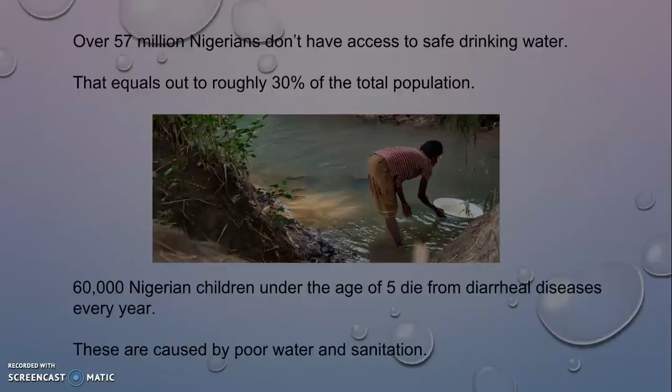Not only that, but 60,000 children in Nigeria under 5 years old die annually from diarrheal diseases caused by poor water and sanitation. Now, we weren't aware of some of these statistics until only recently, and here's how it began. We all went on a vacation to Nigeria. As we toured some of the known landmarks in Nigeria, we stumbled across a village. Nigeria had many more villages than cities, so it wasn't much of a surprise.

But when we examined the village a little closer, we saw that there were some hard-working Nigerian children walking back to their village with containers full of water on their heads. These poor souls were supplying water for the entire village to drink and survive. After seeing the children, we quickly became curious about where its water was actually coming from, so we walked in the direction of where the children came.

A kilometer or so later, we found it, the place where the water was coming from, and we were shocked. It was a filthy river with opaque brown water that could not be healthy for a human being under any circumstance. To make matters worse, we saw some of the children sipping up some of the grimy water from the river just because of how thirsty they were. We couldn't bear this sight, so we asked our tour guide why they were drinking this, and he simply replied that they had no other choice.

The Nigerian government could hardly give a damn because they were blowing money on road infrastructure. We became furious, and we decided there had to be a change. The villages in Nigeria couldn't go on like this. So after weeks of research and theory crafting, we came up with a solution. Our solution to the lack of potable water in Nigeria is broken into 2 parts. The first part revolves around acquiring the water. We propose that water wells should be drilled in villages of Nigeria.

These water wells can help to acquire water that is of far better quality than the water that lies in the polluted rivers. Groundwater is free of disease-causing organisms and virus-inducing bacteria, as well as many other contaminants that would be found in water exposed to open nature. Not only that, but water wells are relatively cheap and efficient as well. Just one water well can support an entire village of over 2,000 inhabitants and costs about $8,000 on average. The cost can vary, however, between $500 and $50,000, depending on depth to the water, soil toughness, etc.

The best method of creating water wells is mechanical borehole drilling, which involves using a large drill to create a hole into the ground, usually around 30 feet deep. The wells are then reinforced with concrete to wall off the dirt, and a metal seal plate is placed on top of the well to prevent the groundwater from being contaminated. The wells also have a mechanical water pump built in, so that the water can be safely acquired without much physical effort. Now, even though groundwater is relatively clean, it still requires some filtering as it is not 100% drinkable.

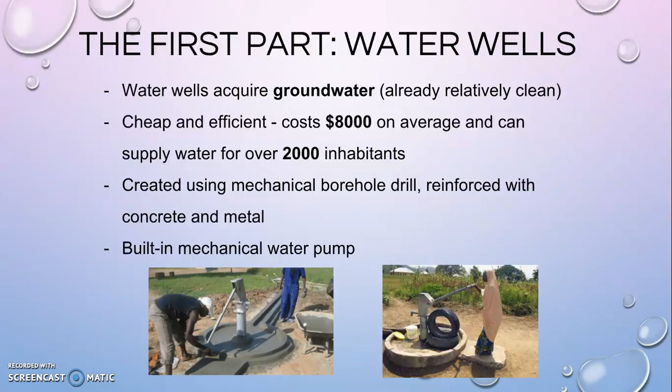This leads us to the second part of our plan, which is cleaning the water itself. On the pump of the water wells, slow sand filters will be attached to filter the water as it is acquired. These filters keep out many contaminants such as sediment and elements like arsenic and iron. They also significantly reduce any odors in the water and improve its overall taste. Slow sand filters are made with layers of sand and gravel. On the top layer of the sand, a biological layer made up of microbial bacteria is grown, called schmutzdecke, where particles of foreign matter and biological matter are absorbed from the water.

One of the best things about these filters is that they are quite cheap, as the materials can be found very easily and constructing one isn't too difficult either. To create an automated filter, it costs around $600. The only downside of a slow sand filter is that, like its name suggests, the rate at which it filters water is kind of slow. It filters approximately 250 liters of water per hour per meter squared of sand. This shouldn't pose much of a problem, as it is more than fast enough to get water for everyone in the village throughout the day.

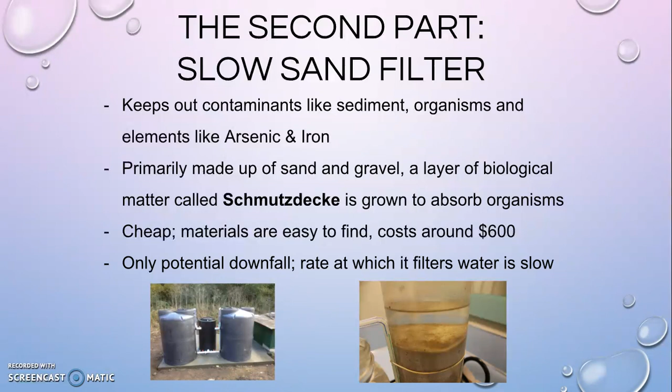Here's a quick rundown on how the filter actually works. The contaminated water comes in through the opening valve, where it then passes through the schmutzdecke, removing all of the biological matter from the water. It then goes through the sand and gravel, where sediment and metals are cleared, and it finally goes into the underdrains, where it flows to a tank of water from which it can be obtained.

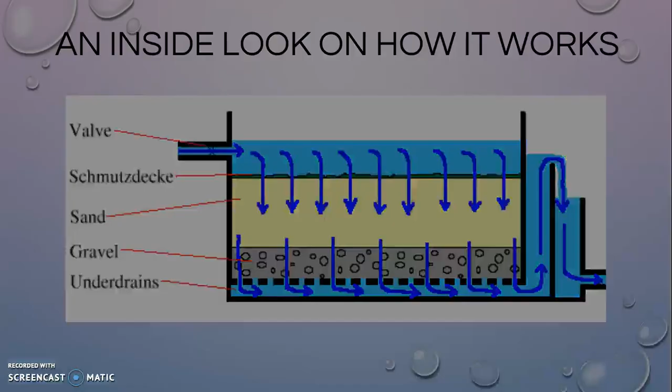So why will our plan work to effectively reduce water poverty in Nigeria? There are multiple reasons. Our plan is very cost efficient compared to some other water treatment techniques used in other countries, so the President of Nigeria is more likely to help us put our plan into place. Also, the method of acquiring the water isn't very hard for villagers to operate, so it would be easy to teach them. Moreover, water wells are safe, so even kids would be able to operate them. Finally, water wells can last almost 10 years before they need to be revised or replaced.

Our idea of effectively acquiring water through water wells and using slow sand filters has been thoroughly planned to adapt specifically to Nigeria's geography. The wells suited Nigeria far more than a desalinization plant because of its location relative to seawater. Also, the slow sand filters were used because UV, ceramic, and activated carbon filters require lots of energy and raw materials that cannot be found in Nigeria. The outcomes of combining these two relatively inexpensive methods help us provide safe, affordable drinking water to every village. After all, access to clean water is a human right, one that we take for granted.